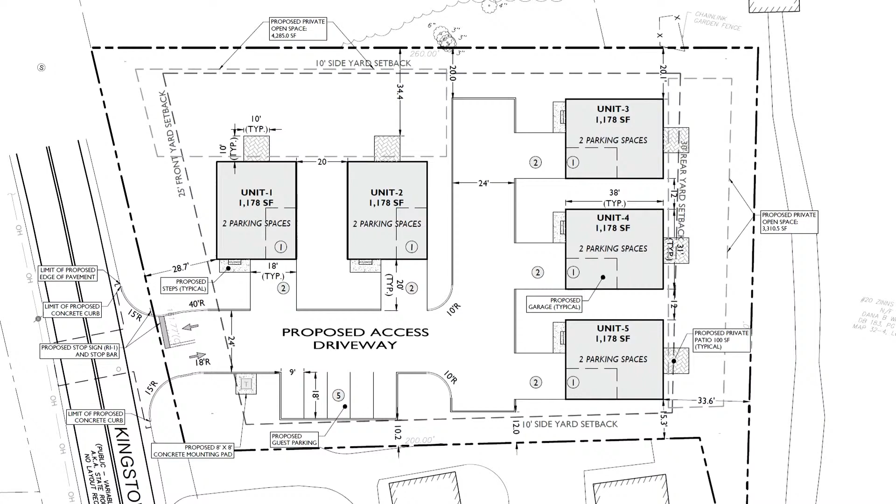So we are in full compliance with the zoning ordinance. We are, however, requesting one waiver from the subdivision regulations, which is building separation. The required minimum is 50 feet, and right now we're proposing a minimum of 12-foot separation. The idea behind this is, as opposed to doing a typical multifamily style, we wanted to do separated single-family units to give it more appeal to families, as opposed to some of the more typical smaller units. If you guys want to go into any questions, comments, or suggestions you might have, I'd be happy to answer.

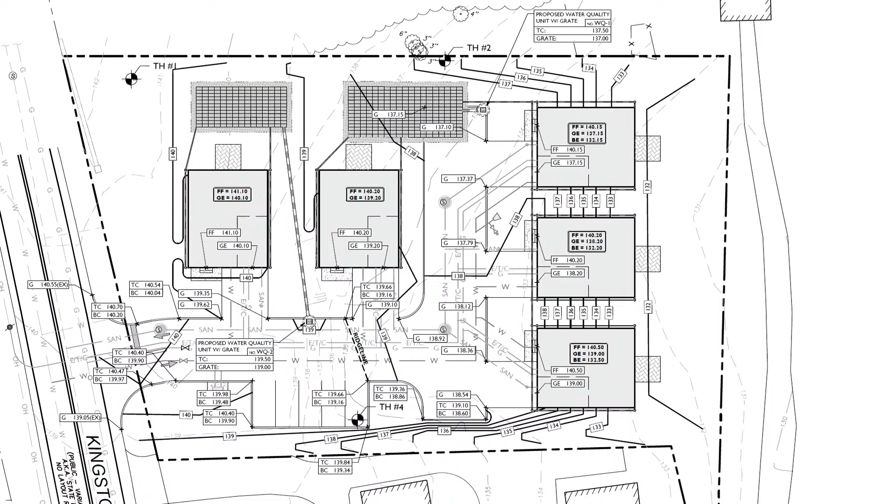Yeah, I don't know if you're able to see it on the plans here. I believe it's just south of the project site. I'm sorry, I might have to... I believe it's shown on the plans. I think it's actually located down the road a little bit here. We can try to pull it up.

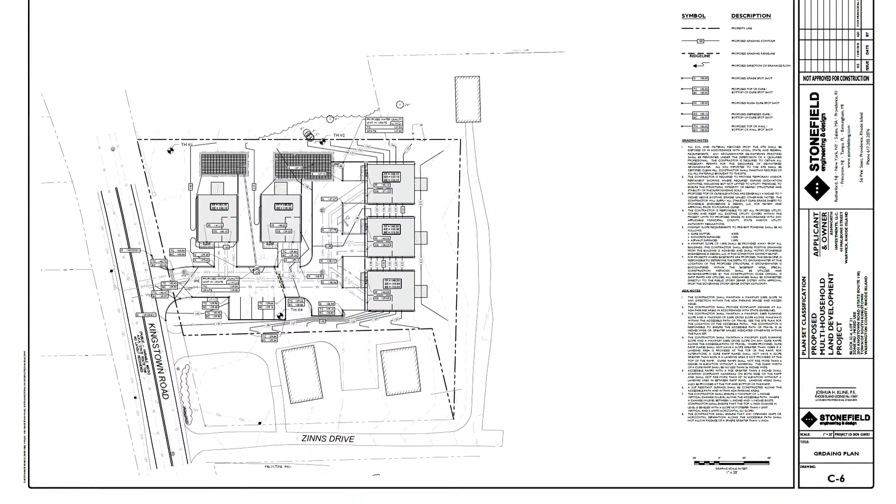Sorry, I don't have the exact number for you, but I believe it's about 100 feet off of that northern property line. We can show an expanded plan of the actual distance on a future edition.

Yes, please. I would like to know because you're putting a densely populated area in there with housing and cars and vehicles and things of that nature. I need to make sure that we have a water supply in case something happens in the far unit, unit 3. Okay, we can get into it.

Also, my next concern is going to be fire department access. Once we get in with a fire truck, or the ladder truck, we turn our radius and enter in going towards unit 3. You have to also remember the backup space that we need to get in the hammerhead to turn that truck back out. So that looks like on this diagram, a very narrow backing point by unit 5.

Yeah, we have run fire truck simulations in-house. We can definitely provide those drawings, but from our results with the standard ladder truck, we are able to pull into that furthest lot and then use that hammerhead to turn around. We'd be happy to provide that. Because what I'll do is I will provide you my ladder truck length, width, and turning radius as required, and you can see if it matches. If not, you will have to make adjustments accordingly for that truck.

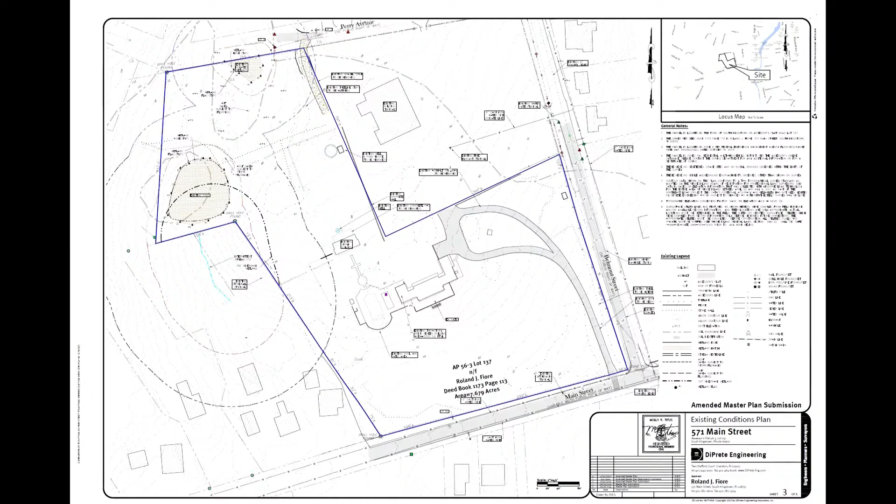It's been at least a year since we've been in front of the committee, and for those who aren't aware, there's been some substantive changes to the plan based on feedback from the initial planning board meeting on this amended master plan. It all stems from an approved master plan that was a result of some litigation that happened many years ago. That was resolved, and really the crux of the settlement agreement between the applicant and the town was to work in concert with the town to address a number of the drainage and runoff issues along the rear of the property that are pretty notorious, as I understand. There was a clear agreement to work with the town and try to address these things, and that's some of the reason for the redesign.

There's been a reduction in the amount of units from the previous iteration. The original approval, and even our original amended master plan application, had 36 units - that was the cap under the approved master plan. We've since reduced that to 28 units. It's far less dense than what would be allowed by right on the property. We're not requesting any waivers from setbacks or anything. So there's been some substantive changes really just in regards to density.

The southeast corner of the property, we've reoriented those units - there's 14 units there - to be more of a courtyard style. That's consistent with the original approval. There were some changes to that with our initial amended master plan, and there was a desire to keep that more concentrated in a courtyard style. It's more attractive, pulls it further away from Belmont, and reduces some of the visual impacts along Main Street and Belmont.

Really the most significant change, though, that Molly can get into is the extension of Perry Ave, and we're completely aware that that's going to be an undertaking, and we need to explore the extent of the road construction and access and utilities that are coming in. But the idea is to improve Perry Avenue, but not quite as far as we had proposed with the last iteration. We had it going much further west to the left side of the existing water body and the wetland body there. There were some changes in the regulations and almost a year delay in getting DEM to do an edge verification and verifying that the drainage would work here with this redesign.

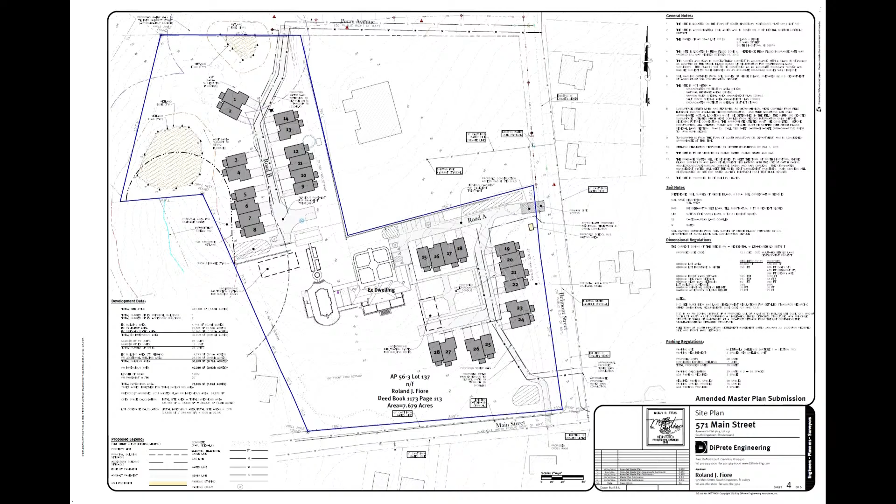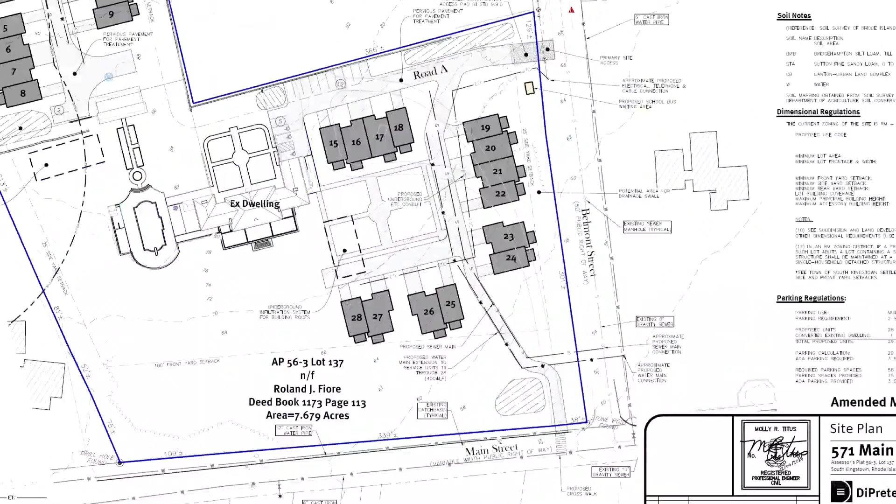Good morning, Molly Titus from DiPrete Engineering. Beyond what Matt said, I don't have a lot to offer other than some clarity on the crosswalk. The crosswalk is shown as proposed, and that is a carryover from the 2014 approval. In doing some research, our original approval in 2014 had a sidewalk coming through that existing driveway, and I believe that's why the crosswalk was added. I was going back through some of the old records, so we would not like a crosswalk in that location. The existing drive is to remain. We would prefer to remove it, and part of the planning board's comments was to seek DOT approval for that crosswalk, but we would like to remove that from the proposal.

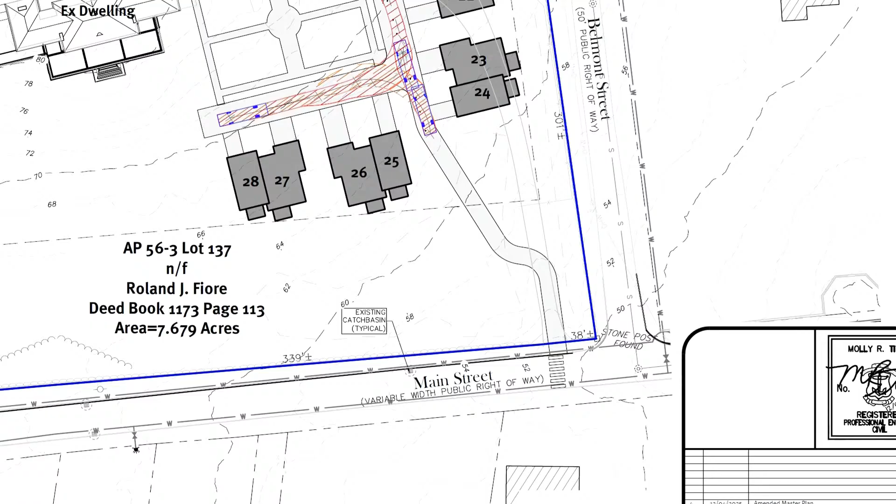Beyond that, as Matt mentioned, the site plan improves circulation within the property, but does not provide a connection between Perry and Belmont. So we'd be looking to have two distinct sets of utilities, with distinct stormwater systems. And in keeping with the discussions on Perry Avenue, we had proposed new water service and new sewer, and it was the understanding of the applicant that this would involve some redesign and construction of Perry Avenue, which he has agreed to do as part of this project.

Beyond that, we've done some very limited soil testing. We verified the wetlands to confirm we can design a drainage system that will work on this property and alleviate some of the concerns on Perry Avenue. Beyond that, I don't have a lot. We are at master plan, so any questions or concerns?

As you said, I did provide the fire turn movement plan. We're proposing new hydrants. There's existing hydrants on Main, there's not one on Belmont. There's a private hydrant at the Elks, and then we're proposing a new one in the rear of the property. Is that it, Molly? That's it.

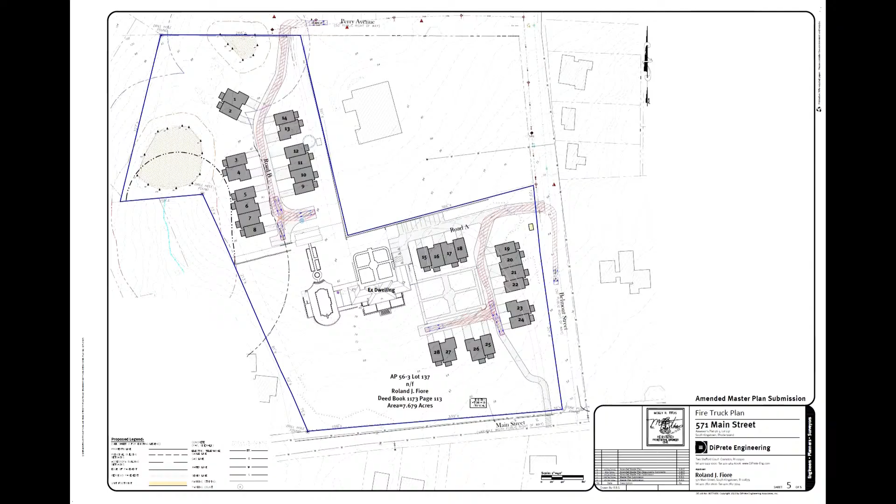Got ahead of myself. So you've answered my question in reference to the way that's going to come out where the crosswalk was - that's the existing entrance. It's going to be maintained, I would think that's a gated entrance right now, but in the event of an emergency, that's obviously another means of egress and access. Okay, thank you. Yeah, because we do have fire access to that gate. Yes, being there, which is awesome.

I like the fact that you're giving the fire turn radiuses and access points, upgrading the water flow and hydrant system within the area. The hydrant located at the Elks property is not classified as a hydrant we will utilize, due to it being a private hydrant.

And you did mention that you were going to put one on Perry at the entrance within that area. Yeah, it shows on the site plan. It's kind of partially down next to Unit 14 is where we've shown it right now, but we're flexible if you want it closer to Perry. Okay, if it goes on that, it would be classified as a private hydrant because that is on private property. Yes. So, okay, not a problem. Thank you.